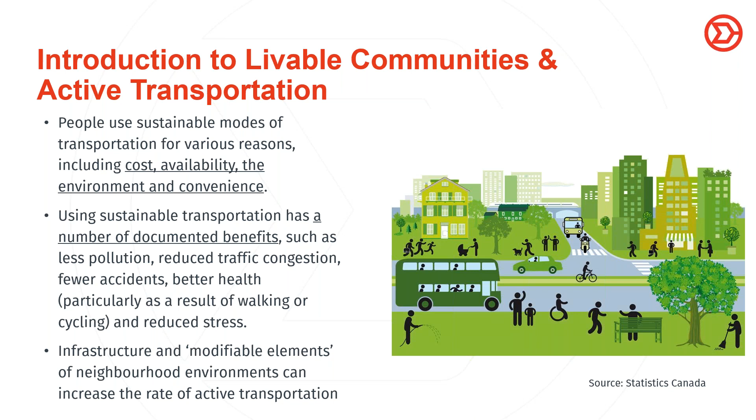Some quick statistics: active transportation accounted for about 31.4% in 2016. About 5 million people used some mode of sustainable transportation, whether public transit or carpooling. Of that 31.4%, almost 7% used a form of active transportation - walking, jogging, running, cycling - as their main mode to work, looking at growth from 1996 to 2016, a 20-year span.

The number of cycling commuters increased dramatically, by 87.9% in all metropolitan areas combined. Meanwhile commuters driving led to greater traffic congestion and likely more time to get to work from roadways - we're looking at a 3% gain from 1996 to 2016, a 20-year span.

But what we could see as we move to sustainable transportation methods - these stats from Stats Canada - we might see another 3% gain, but as we introduce sustainable options to communities and industry, we'll likely see less congestion, more pods driving groups of people to work, smart and self-driving options. So we could see a shift of about another 3% in the next 20 years. As we progress to these new sustainable, smart integrated options, we may see congestion reduce to where there's very limited congestion and a lot more carpooling happening.

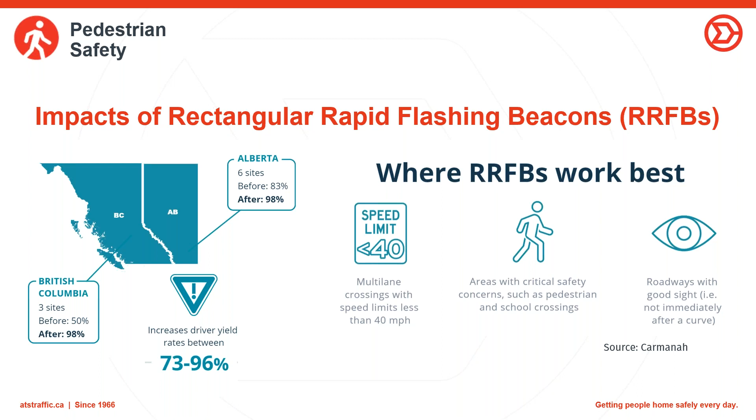They don't require a lot of repair, very minimal repair. In fact, you may have to replace a battery, and that can be done in maybe 3 to 5 minutes tops. With quick maintenance through ATS Traffic, we have an exclusive partner benefit with Carmanah which includes all on-hand parts at local branches. We have a bunch of consignment units in stock, so we're very capable of turning around these units and getting them out to the customer in a reasonable and short amount of time.

We've also developed a temporary solution with the RRFB as well. We've got them on a concrete base, delivered to site. Then during your temporary construction or temporary traffic control project, or anything roadworks related, pathway related, or sidewalk related, we can put out a temporary RRFB to really bring additional awareness and safety to that work zone or roadworks project.

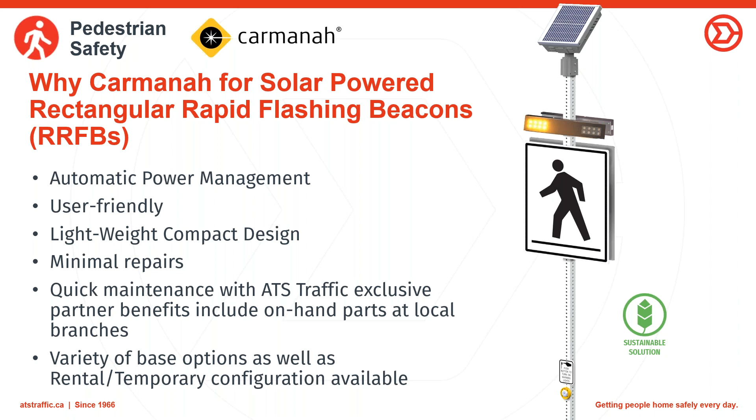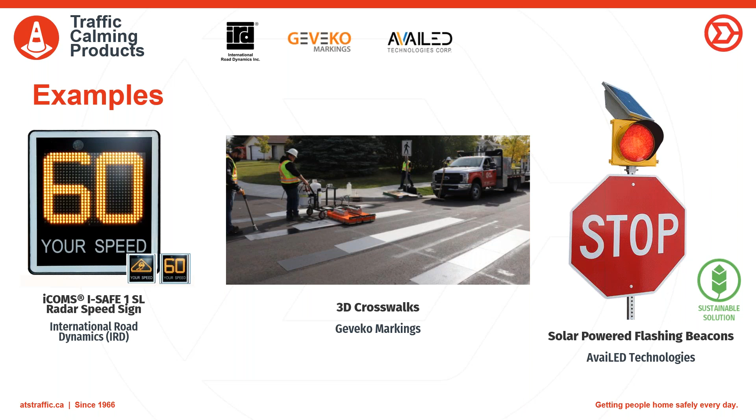We move on to 64% of Canadians expect that there will be more cyclists in about 5 years than today. So this is important now for the next 5 years, that we have to learn and work and share the road for a better cycling infrastructure. And then 63% of Canadians believe there is a need for future investment in cycling infrastructure in their communities. These next products will show various ways to implement some shared infrastructure with motor vehicles and with cyclists.

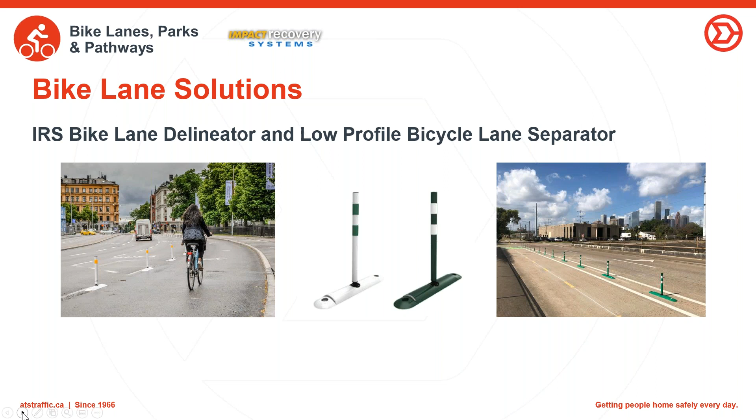We're talking about Pexco's bike lane solution as well. The FG300 flexible post and the Pexco City Post are multi-purpose. You can use City Post for bike lane and shared pathway delineation, or you can also use City Post in other areas of your business for just delineation, parking lots, or something like that. So it doesn't have to be specific for bike lanes, but the City Post and the FG300 have varying purposes and varying areas to be installed at. It's the ability to install it in any situation that's highly flexible with the FG300 and the Pexco City Post.

Going back to implementing bike lane solutions, we've got an Aqua Route product and a Plasti-Route product. I'm not going to get too deep into these because we'll be hosting additional webinars for these later on in the year. But these products are very easy to apply. They have a 6 to 8 year lifespan, they're highly durable, they're very vibrant, and they do not typically take specialized equipment to apply.

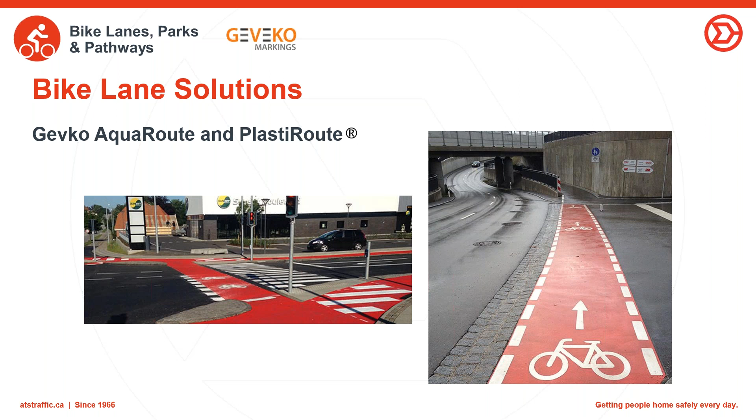With the Aqua Route, you absolutely can apply it with a specialized piece of equipment. You would need a 98-2 machine. Benron makes a really good 98-2 sprayer, so you can put Geveko materials through a Benron 98-2 machine, no problem. That's a spray-on application - you just kind of mask it off and spray away. But the alternative is a more labor-intensive piece, talking about hands-on labor.

The unique piece of this is that we've got a preformed thermoplastic marking that we were able to bond with the other branded Geveko marking. The unique feature of Geveko is that their products are all made to work with each other, they're brand specific. So you can roll on the Plasti-Route, let it cure for about 4 hours, and then go right back and hit it with a torch to melt on the preformed thermoplastic marking, and it still makes all of those mechanical bonds that all of the preform and liquid markings make. It basically becomes a permanent part of the road surface - it would be there until they repave that parking lot, essentially.

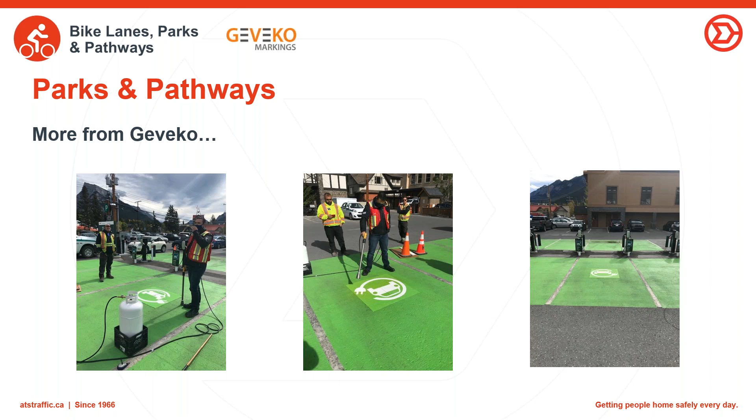Talking about additional parks and pathway features, you've got solar powered pathway lighting from First Light Technologies - really cutting edge stuff for commercial parking lot applications, recreational bikeway pathways, and outdoor spaces. They're all self-contained, unobtrusive, and they've got a really nice, pleasant design to them. They're designed to kind of blend in, but also enhance the look of your community.

They have adaptive LED technologies. There's no real electrical design, although we do have other options available for AC and whatnot. But if you go with the solar option, there's no wiring, there's no trenching.

It takes about 15 minutes to install. Maybe the biggest one, we use screw piles to put them in. It's a very simple process to install. The biggest piece is no electricity bills after that.

So once you take your grid offline for what's currently powering your park and pathway lighting, that's all just money going back into the community and back into the budget for you to spend on other sustainable solutions. And again, it is a sustainable choice without recurring carbon emissions, since we're not burning coal or doing anything to generate the power to power the lights. This is all powered on its own by solar power technology.

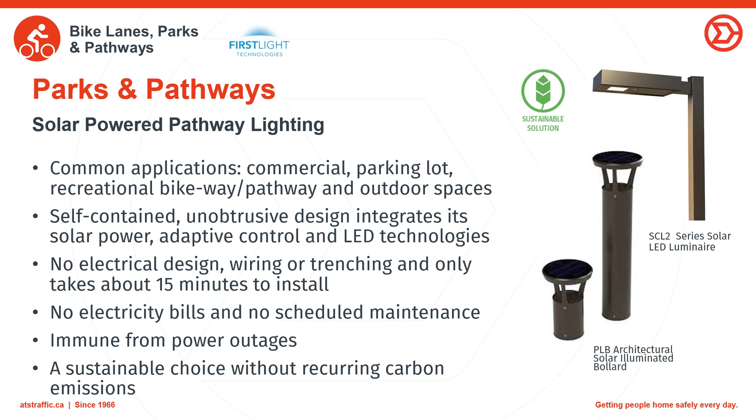A couple of examples here. We've got some stuff in Devon and North Battleford. The one in North Battleford was really done for security purposes. There was just not a lot of lighting in the downtown core. We were able to go in with this solution and install solar-powered street lights, a solar-powered bollard, so that they turn on and off as they detect presence.

The same thing with the Devon installation. They can all be customized with an application. So if you have Google Home, or Globe smart light bulbs, or even Philips Hue smart light bulbs, if you know how to use those applications, it's very similar to using the First Light applications. You can go in and set schedules, set different intensities, and set different parameters. They can follow someone, turning off behind them and on in front of them, so you're not always having all the lights on.

You've got some places that have pathways going through little islands and stuff there. Well, you've got someone on the other side of the lake where the light's always on. This kind of solves that purpose - it only turns on and off as someone potentially goes in front of it during their recreational walk.

And I'm going to throw it to Steve here briefly as well, just to talk about this TRAFx trail, mountain, and vehicle counter system that we've been successful with. Sure, thanks, Wade.

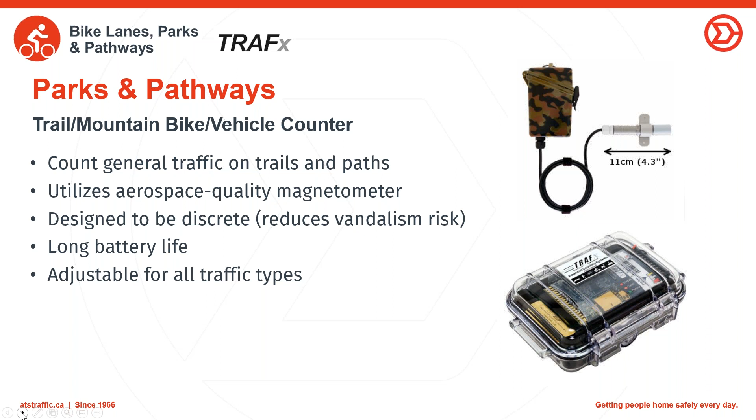So now we're going to talk briefly here and just highlight some of the things that we can do with special event management, and how we apply some of the things we've learned about today to special event management using some enhanced tools. So we've got event traffic management. We deliver, we install by our on-street services team, including all the lane closures.

We do all of the equipment rentals, from message boards and signage to let people know where there's parking available, or what route to take to the parking stalls or parking areas, using barricades and barriers. So we've got barricade and barrier options either in orange or in green.

This green Crowdcade Deluxe from Plasticade, we've done tremendously well in the lime green for the City of Saskatoon. They went with a custom color, and we worked with our vendor partner there, Plasticade, to come up with that color for them. That color is being used as a differentiator between what is construction and what is a special event. We also do solar powered lighting, as well as solar powered camera and security trailers.

The other thing we have is the vehicle barriers, and it's something we always like to talk about because that elephant is always sitting in the room, and someone always has to talk about it: the anti-terrorism and vehicle barriers that we have from MIFRAM. MIFRAM vehicle barriers are designed to be easily deployed and rolled out in place. Should there be, heaven forbid, a situation where there could be an attempted vehicle incursion, this device is designed to dig into the asphalt and almost virtually stop the vehicle from moving more than 20 or so feet into the secured area. It's designed to really damage and tear up the underside of the vehicle, blow the tires, and there's some really incredible footage of the MIFRAM security in action. If you're interested, we can definitely send out some additional videos to show how good those things really work.

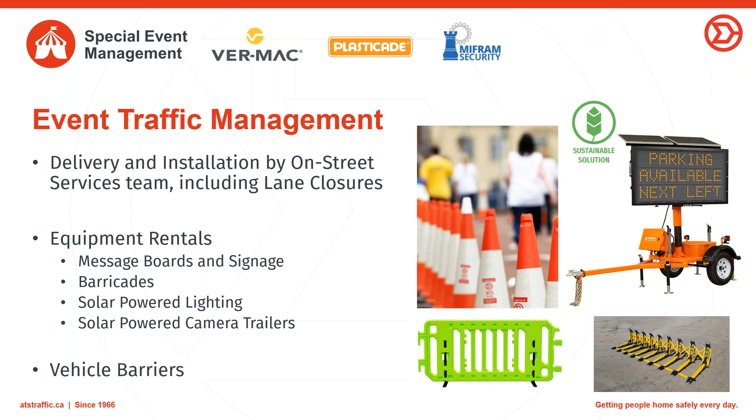Talking about all of these things, ATS Traffic is well known in the industry for our high level of traffic management planning. We have a very experienced drafting team and use the best technology - AutoCAD and customized traffic simulation tools to model work zone impact and queuing. We can even look at turning radiuses and analysis for cross-section, illustrating lane widths, and conflict analysis, in and out of events, peak times at the beginning of the event, peak times at the end of the event, and what happens during intermissions. We take all of these things into consideration, doing very site specific plans, and we incorporate a lot of the innovative products you've seen here today, as well as vulnerable road user considerations.

How do pedestrians, cyclists, and potentially disabled folks get to the site with ease, with the least amount of question marks as possible? We have done a recorded webinar on our traffic management planning. It's on our YouTube channel, so you can check us out on YouTube and look for those live webinars we've done specifically about traffic management planning.

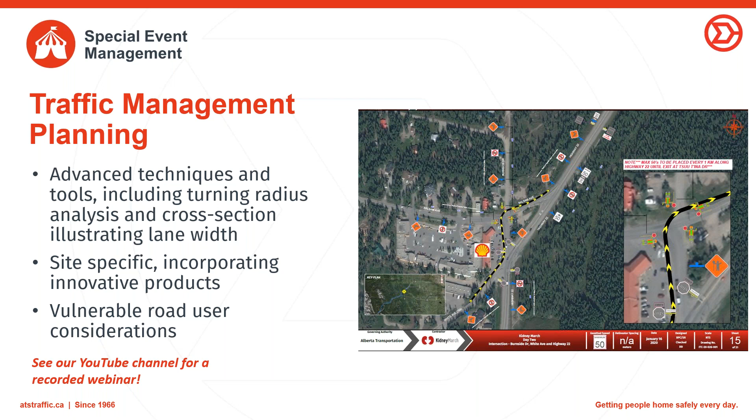At this stage, I'm going to pass it on to Steve Ennis to finish off the presentation here with some slides about data collection and a little bit more about Intelli Traffic and their offerings for livable communities and sustainable options for your community.

Great, thanks Wade. Time flies when you're having fun, so we're going to get right into this here. Into the first slide, which is a toolless sensor platform - this is a new and innovative lighting control platform.

Adding the toolless sensor platform to your existing lighting network can be your gateway to your smart city. Street lights equipped with these controls save you energy by using the precise amount of energy that you need and accurately measure every watt used. But even cooler than that, in addition to doing that, you can collect data off of these things, which very easily plug into any street light, up to 50 years old. So essentially any street light in the world - they have the same receptors and can accept these data collection pieces. All street lights are highly standardized.

There's radar, there's air quality detection. There's also a safety flasher version of this, so during school zone hours, you can flash yellow through a school zone for added safety measures. There's noise and acoustic measuring. And then also coming this year, not out yet, there's going to be a live camera.

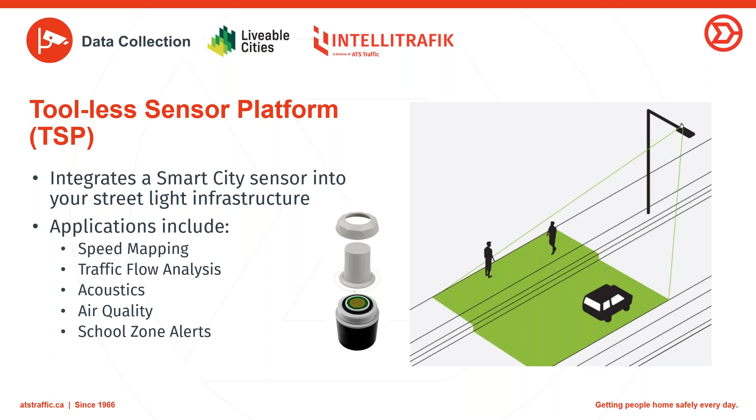So the problem is when we look at intersection safety, often what we're looking at is collision data, insurance provided data, injury data. It's looking backwards, it's looking in the rearview mirror.

What we need is more of a predictive measure of which intersections are the most dangerous in any area, in any municipality. We can do as few as one intersection and as many as 60.

We work with a company called MicroTraffic, a world-class AI company out of Manitoba. What they do is we record the video, we work with them to analyze the video, and they'll issue a report. What this report allows you to do is prioritize your sites on a safety basis, and allow you to spend the money on infrastructure upgrades in a smart and data-driven way.

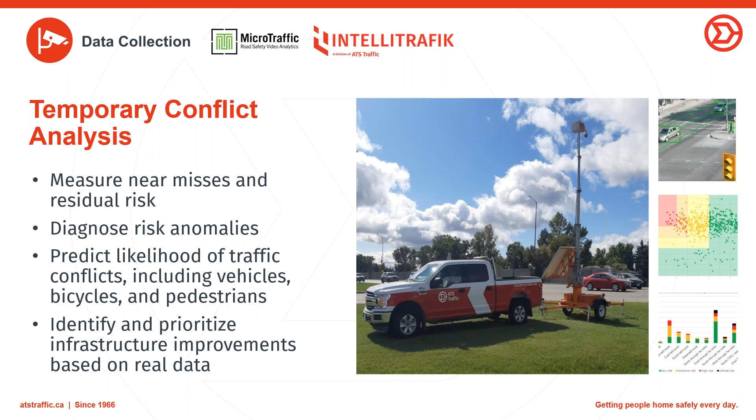Parking insights, parking intelligence and insights. So we offer camera-based parking data and insights, and essentially this is parking detection. It determines where spots are available. This data can be pushed to an LED sign at the entrance of a parking lot, or it can also be integrated into other applications.

So say for instance, a municipality operates many parking lots, or they have an event going on like a park and ride sort of thing. They can offer their people, the public, intelligent data-driven parking options. So when I say that, I'm basically talking spot availability. The system is also able to track vehicle and people movements through the parking lot for purposes of planning ramps, line striping, signage, and other enhancements to the parking lot.

Intersections and crossings, next section here. First, we'll speak to adaptive corridors. This is our newest partner out of the States. We just signed the agreement, and we are really excited about this. So the problem is that about 80% of traffic signals in Canada are uncoordinated at this point. Traffic delay, congestion, stops at traffic signals, they all result in citizen complaints.

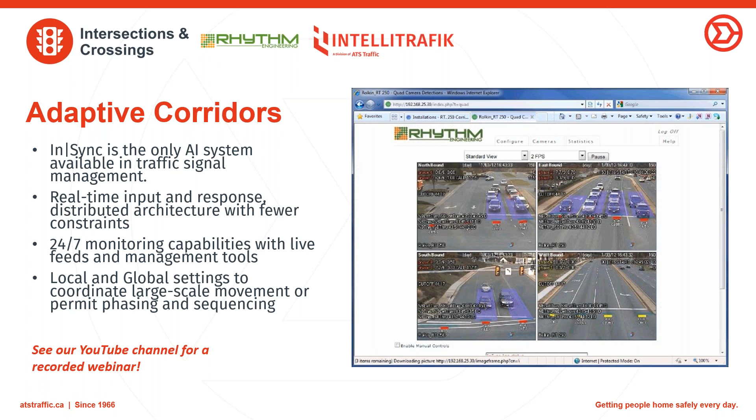Let's speak a little bit about the TrainFo system. This is an offering that brings together a few of our partners: TrainFo, who is the data partner, and Ver-Mac, who is more the hardware, message board, and solar panel partner.

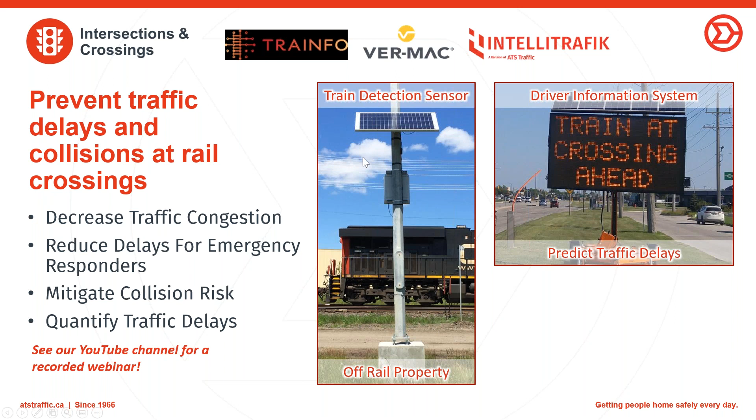Really what we do is detect trains coming down the track, and we advise traffic upstream of the crossing that there's a train coming. This allows them to make better decisions for detours around the tracks, and helps people get from point A to point B quicker.

Quickly on asset management and maintenance: this logo in the middle here is called Reflector. This is our own proprietary asset management software. We use it for a bunch of things internally, but really how we sell it to municipalities is we offer what we call the Smart Sign program.

Asset management for us sort of starts with signs because we do so much of signs. We do signs well. So what we're doing in our manufacturing warehouse right now is scanning every sign that leaves the building. When we scan those QR codes, we're moving all of the manufacturing data we have for any particular sign onto the back of that sign, onto that sticker — including sheeting type, warranty, size of the sign, and what the sign is.

That equips our customers, when they're installing signs in the field, to use Reflector to record a task — that task being install sign. This puts a dot on the map of where that sign is. You can take a picture, and now that asset is live, and you can monitor it from your iOS device.

It's app-based as well as browser-based, so you can monitor this from your phone or your browser. It's really in-field asset management, and that's what makes it different.